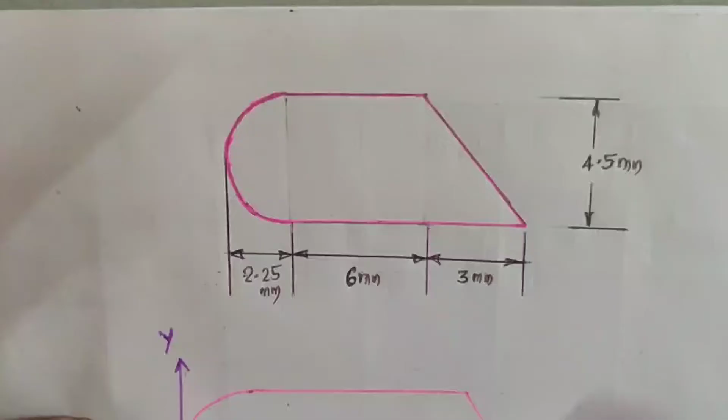Today I'll be taking up the next problem on Centroid. So in this session we'll be solving some more problems to have a better understanding of Centroid. Hope you liked the last session of the Centroid, where I discussed what are the steps to solve problems on Centroid. So in this part we'll be taking up one more problem on Centroid.

So what you see in front of you is an irregular shaped lamina whose dimensions are given. So what is the first step to start with any problem in Centroid? The first step is we have to fix up a reference axis such that the object falls in the first quadrant. Now the second figure what you see here is the same as the above one, but it is shown with the reference axis, such that it is falling in the first quadrant. So the reference axis is with respect to the left hand bottom side of the object.

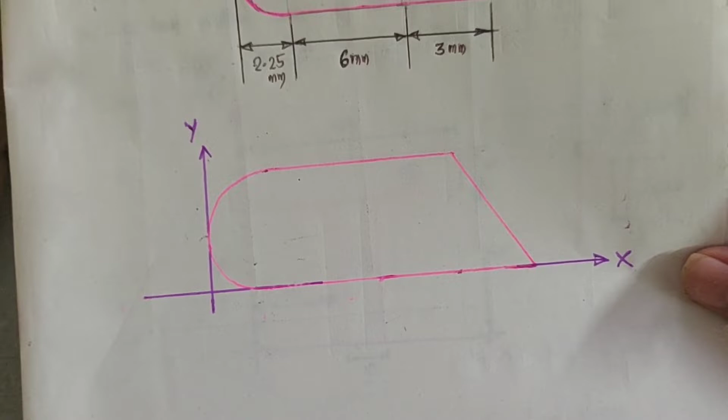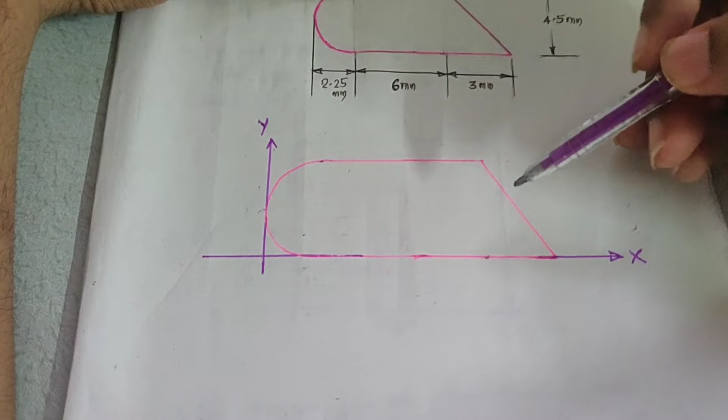Immediately after you fix up the reference axis, what is the next thing? We have to locate what are the possible known geometrical shapes that we can make out from this particular figure, so that we can divide them into smaller areas. Now when I see this figure as one, is it possible to locate the centroid? It is not possible, because I cannot arrive at any mathematical formulas. But I have derived some of the relations for some known geometrical shapes whose x bar, y bar have been already derived. So for this given figure, I'll divide it into the known geometrical shapes. Now how will I divide?

So what are the possible known geometrical shapes that you can make out from this? So one is, if I draw the straight line here and break this object, what is the shape that I am getting? I am getting a shape of right angle triangle. See here, I know this base, it is 3 mm from this tip. So if I divide this, I know what is its base, I know what is its height. It is 4.5. So I got one shape, it is right angle triangle.

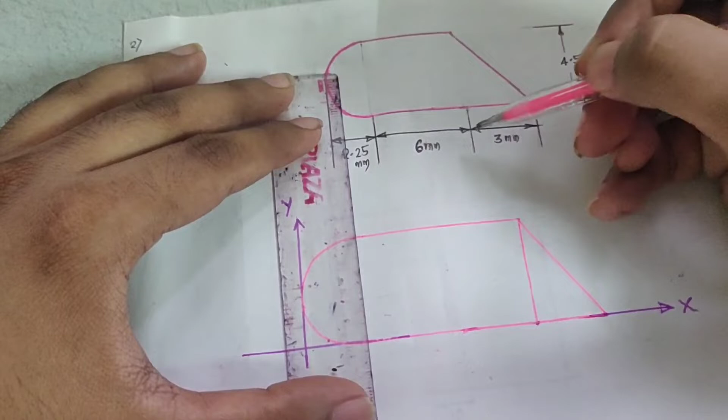If I draw one more line, from this to this it is 6 mm, so what is the shape that I am getting? I am getting the shape of a rectangle, right? So the rectangle base is 6 mm. The height is 4.5. Now what is the shape of this? This is the shape of semicircle. Now this 4.5 will be the height for this right angle triangle and rectangle. But the same 4.5 will be the diameter of this semicircle.

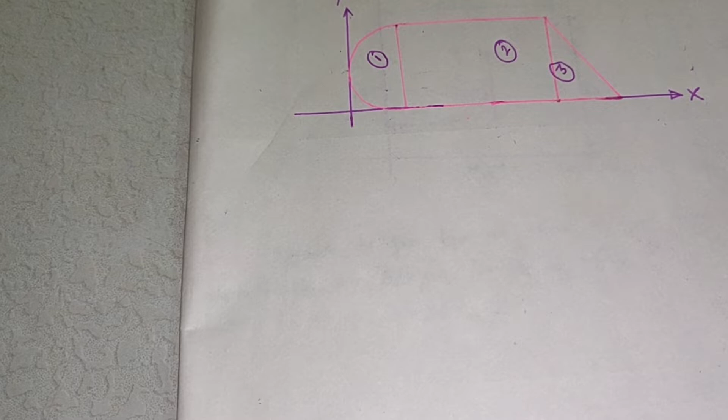Now I got 3 different geometrical shapes. So I'll mark them as 1, 2 and 3. This is the first step. This is the second step: I divided them into a number of shapes. Now to the next step. The next step is I need to subdivide those figures and locate their individual centroid. I should locate the individual centroidal distance of those elements.

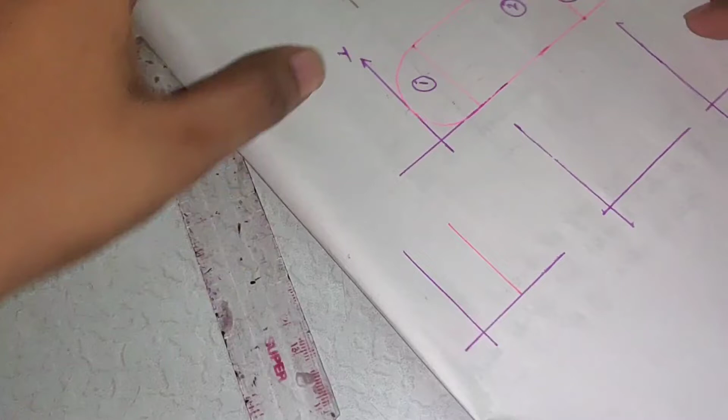Now what I'll do here is I'll subdivide them. So the purple line what you see indicates the reference axis. Now where is this first shape? This semicircle is here. So the semicircle is touching the reference axis. So its shape is like this, right? Then what about the rectangle? From this reference axis, from here it is the semicircle. So leaving some distance, the rectangle part starts.

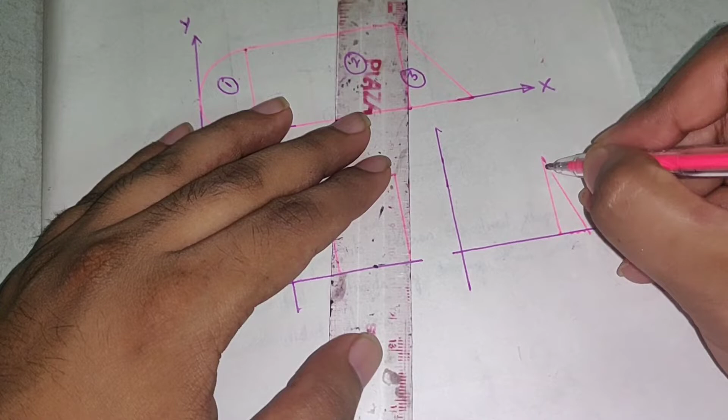Now to locate them with respect to their original position from the main figure. So this is the rectangular part, which is the second object. Now where is the third object? The third object is somewhere here. So it is at what distance? That is the distance of the rectangle and triangle. Right. Now what is the next step? Next step here is we have to locate their individual centroidal distance. Now the tricky part is with respect to the first figure.

Tricky part is with respect to what? It is with respect to the first figure. Why first figure? You'll understand now. Now we have derived the x bar, y bar value for semicircle. Now this semicircle, where should I cut such that area on left hand side and right hand side is same? Now if I cut it straight, will the area on left hand side and right hand side be same? No, it is not.

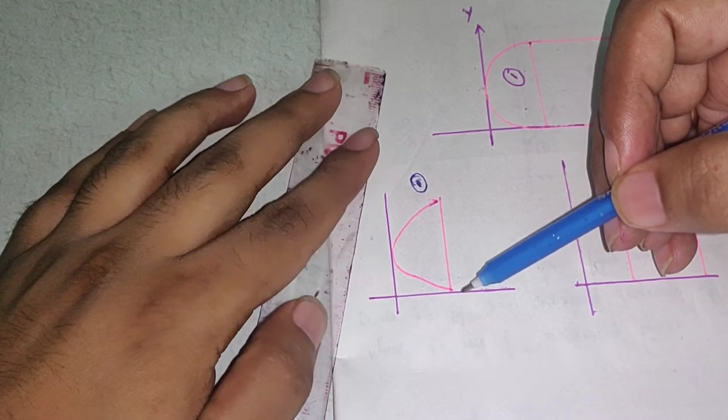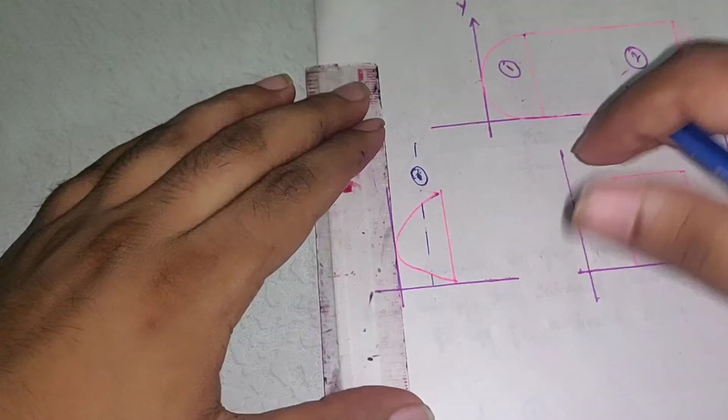But if I cut it horizontal, is the area on the top and bottom same? It is symmetrical about horizontal axis, but it is not symmetrical about vertical axis. So vertical axis is at what distance? Right, so let me show you a small part here.

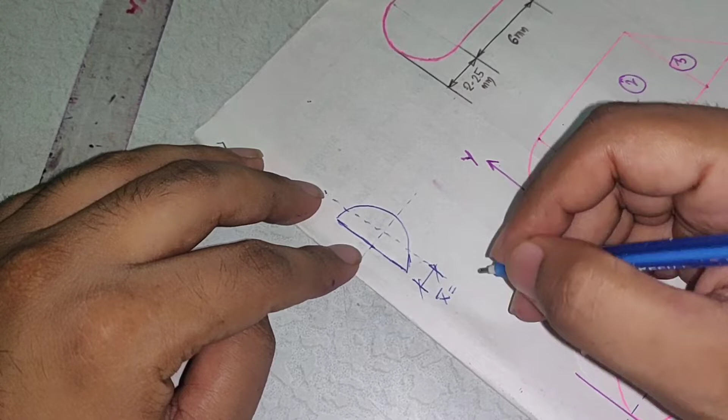So when we derived the relation for semicircle, I'll give some small explanatory notes here. The semicircle was placed like this, and we calculated its distance from here, and we termed this as X bar. If you don't remember, you can go back and check the derivation video. We marked this as X bar, and we had taken reference axis here like this. And after derivation we got to know that this value is 4r by 3 pi.

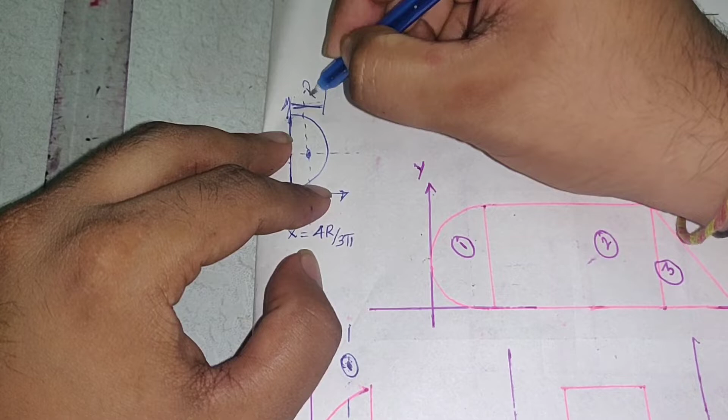But look at this semicircle now in this problem. The circular part is this side and straight line is here. So from this to this center is 4r by 3 pi. So what is this full length? This full length is radius, and this full length is diameter, right? So this is 4r by 3 pi, from this side to the center.

Now this semicircle, in this particular question, it is reversed like this, and this part is touching the reference axis. But 4r by 3 pi is from which side? This side. So in this figure, where is 4r by 3 pi? Take this figure and keep it ulta. 4r by 3 pi is here. I'll call this as G1.

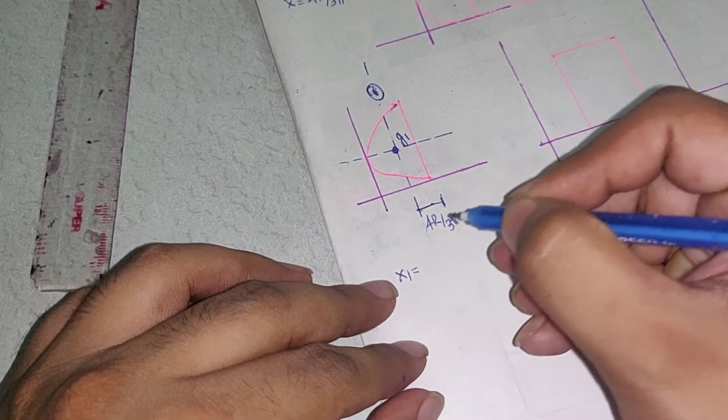But from where do I require the x1 distance? x1 distance is calculated from reference axis. I know that this distance is 4r by 3 pi. But x1 is from here to here. This is x1. So what is the value of x1 now? What is this complete distance? This is radius. How much is the value of r?

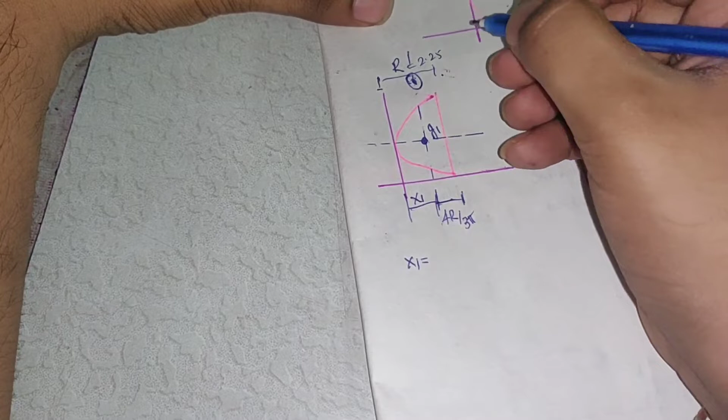2.25. So if this complete distance is 2.25, this is radius, then x1 distance will be R minus 4r by 3 pi. So that will be 2.25 minus 4 into 2.25 divided by 3 pi. So this will be your value of x1.

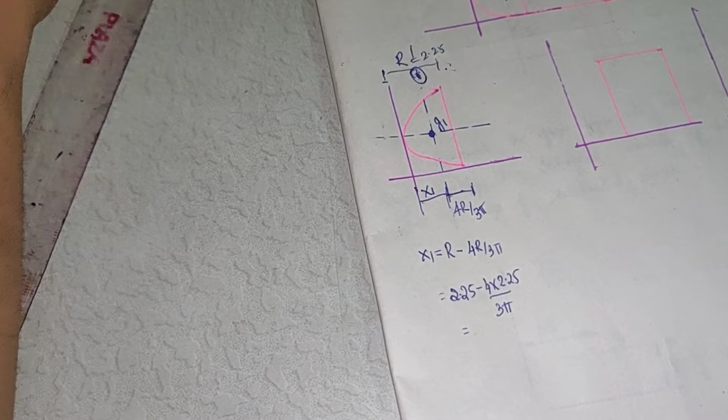So you calculate this, and you'll get the value of x1. Wait, we'll finish it off. So 4 into 2.25 divided by 3 pi, and it is 2.25 minus that. So you'll get this value as 1.29 mm. So we got x1.

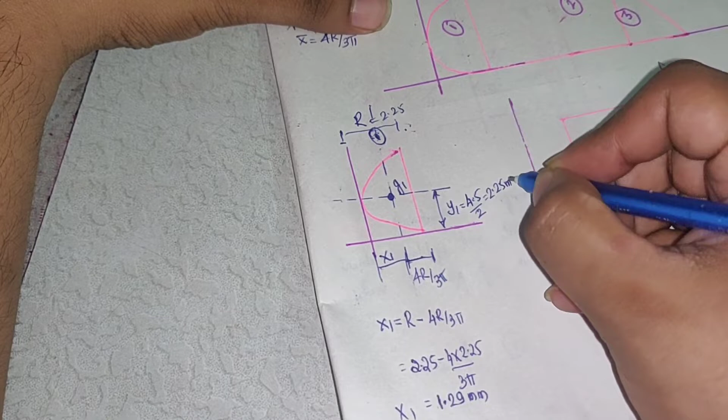Similarly, what will be y1? What is the total diameter of this semicircle? Total diameter of semicircle is 4.5. This is symmetric about the horizontal axis. So y1 will be 4.5 divided by 2, which is 2.25 mm. Okay, hope you understood this.

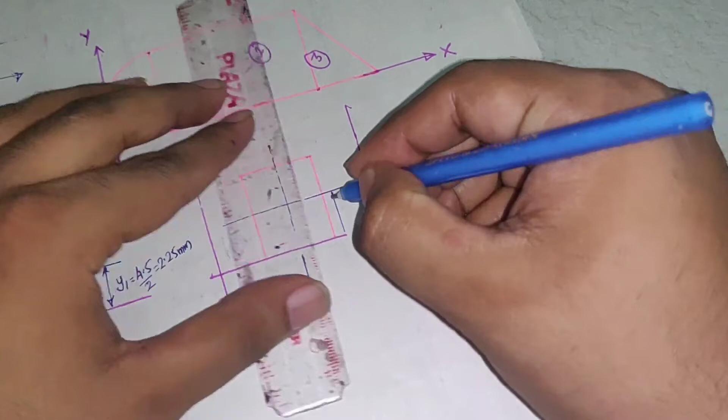Next, moving on to the center of the rectangle. What is x2 distance now? X2 distance, you have to calculate that. Wait. So I want x2 distance and y2 distance. We'll quickly finish off with y2 distance.

So what is the formula for calculating x bar and y bar for only rectangle? It is b by 2 and d by 2. So total height is 4.5. So y2 will be 4.5 divided by 2, which is 2.25 mm. What will be x2 distance? Now first calculate what is this distance.

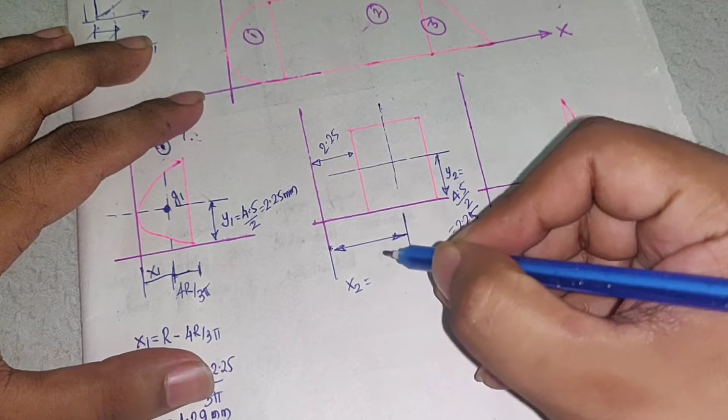This distance is same as the radius of semicircle. So this distance is what? 2.25 mm. But I want x2 distance from what point to what point? So this is point G2, which is centroid of only rectangle. So I want from this centroidal distance to this reference axis. What is the value of x2? X2 value is, this is 2.25

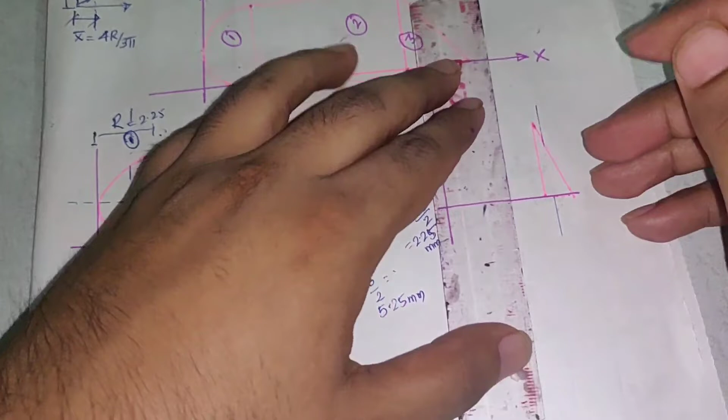plus, what is b of this? So what is this b? B is 6 mm. So x bar of rectangle is what? 6 by 2. So 2.25 plus 6 by 2. So we'll get 3 plus this 2.25. This is 5.25 mm. 5.25 mm. Similarly, for this rectangle, this right angle triangle,

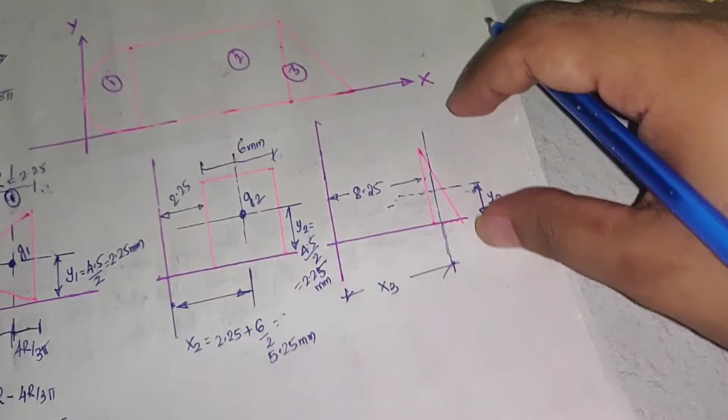so this distance is y3 and this distance is x3. Now what is the distance from the edge of the right angle triangle to the reference axis? From this point to this point, it is what? 6 plus 2.25. This is 8.25. But I want from the center of this point, G3, to the reference axis. How much is that? So how will you calculate that?

So for right angle triangle, I had told already that the CG will be, from this straight line, 1/3 of base, and from this side it is 2/3 of base. If you are taking from here, it is 2/3, from here it is 1/3. Similarly for height also, it becomes D by 3 and 2D by 3.

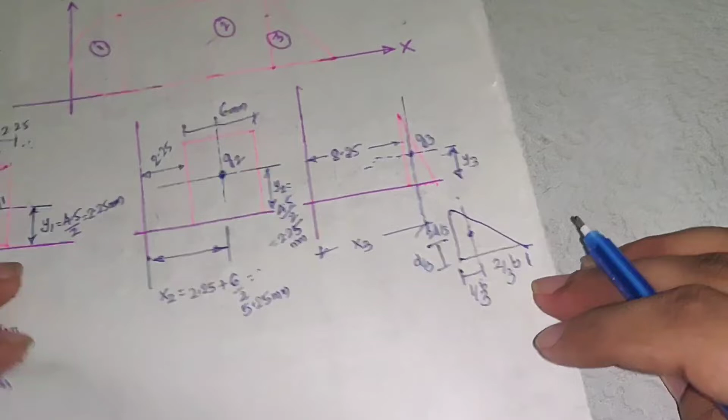Now what is value of x3 here? So x3 will be 8.25 plus, what is base of this? Base of this is 3. So we are taking from this side. So that will be 1/3 of 3. So we'll get 9.25 mm. 8.25 plus 3 cancels 1. So x3 is 9.25. And what is y3?

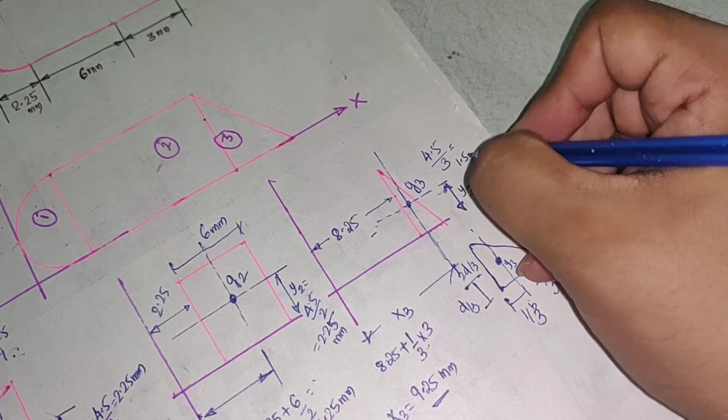So y3, as I said, from this base to the CG, which is G3, is D by 3. So how much is the height? 4.5. So y3 will be 4.5 divided by 3, which is 1.5 mm. So we got x1 y1, x2 y2 and x3 y3. Once you calculate this part, your 90% of the work is over. Next thing is you have to just put it in the tabular column and finish off.

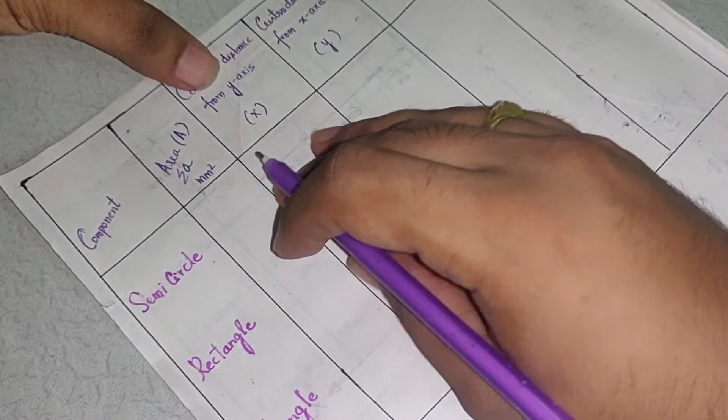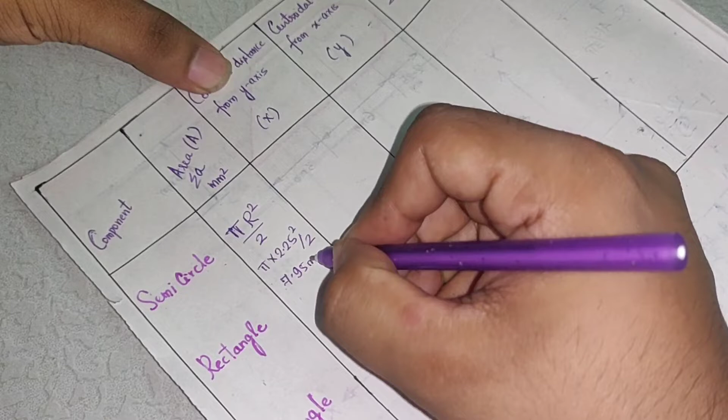Okay, so after you split up the things, the next step is you have to write down those segments that you have divided into the known geometrical shapes: semicircle, rectangle, triangle. Now you have to enter them in the tabular column. Area of the semicircle is given by pi r square by 2. So pi into 2.25 square divided by 2, you'll get the area as 7.95 mm square. So writing a unit is very important, right?

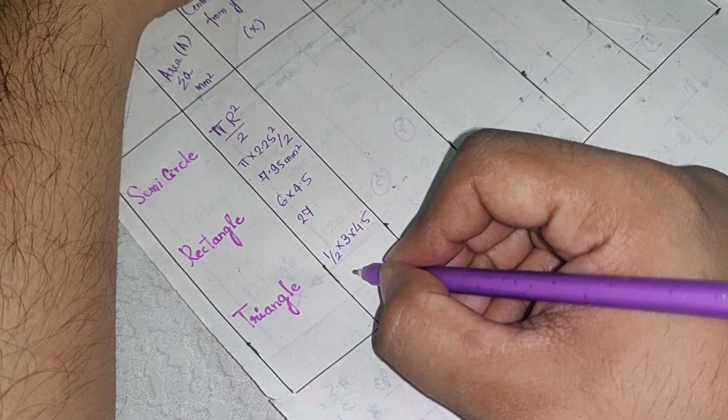So area of rectangle is 6 into 4.5. 6 is the width and height is 4.5. So that will be 27. And triangle is half, base is 3 and height is 4.5. So this will be 6.75 mm square. Once you calculate the area, enter the values of x distance that you have done in the second step. Now what are the x1, y1 distances?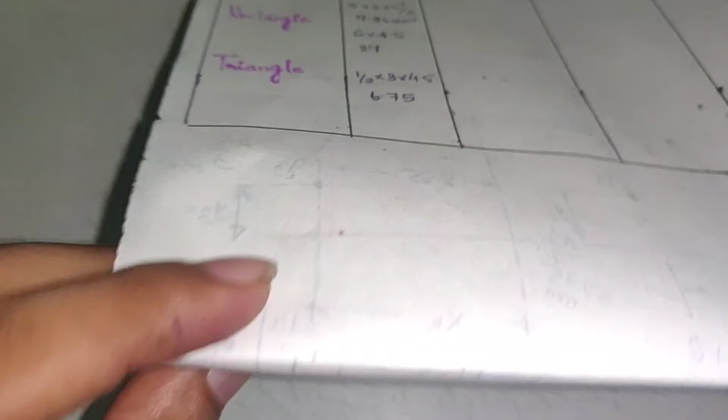I'll show you here. So x1 distance is 1.29 and 2.25 for semicircle. Firstly I'll only consider the x distances. X distance for semicircle with respect to reference axis is 1.29. Then x2 for rectangular element is 5.25. Then x3 is 9.25. X distance is with respect to the y axis, right? That is why I have written centroidal distance from y axis. So write the values: semicircle is 1.29, rectangle is 5.25 and triangle is 9.25.

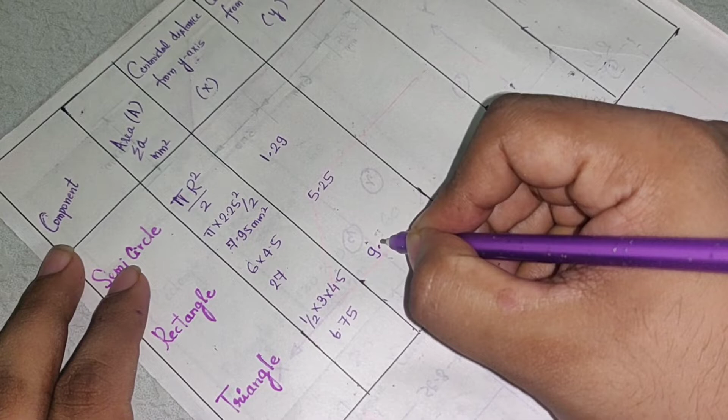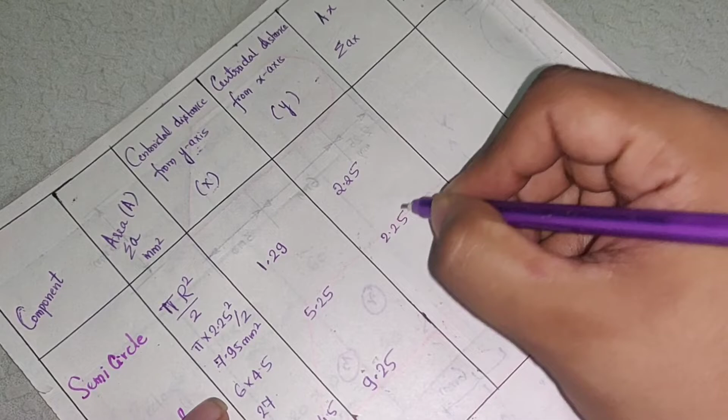So this is x distance. Similarly, go ahead and find out the y distance. Y distance for semicircle is 2.25, for rectangle it is also 2.25, for triangle it is 1.5. So write those values here. This calculation of x distance and y distance is very important. Once you calculate x distance and y distance, rest all things is mathematics.

So area a into x, a into y. So summation a into x is a1 into x1, a2 into x2. So first one is 7.95 into 1.29. Similarly, this is 7.95 into 2.25.

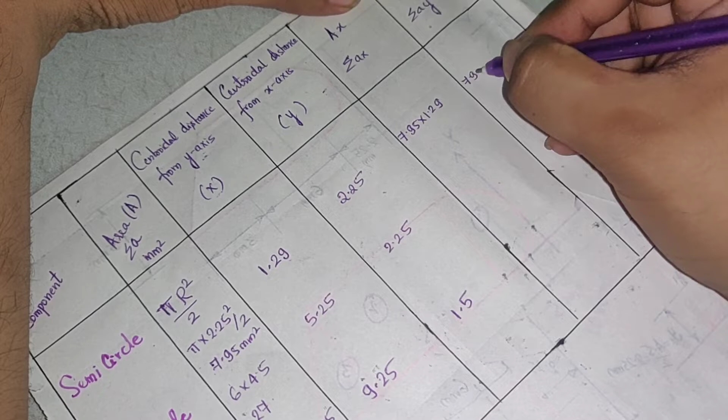We'll calculate that. How much is the value? So 7.95 into 1.29, so we'll get this as 10.25. And this one, 7.95 into 2.25 is 17.88. Similarly, this one, 27 into 5.25. And this is 27, the area, into 2.25. So 27 into 5.25 is

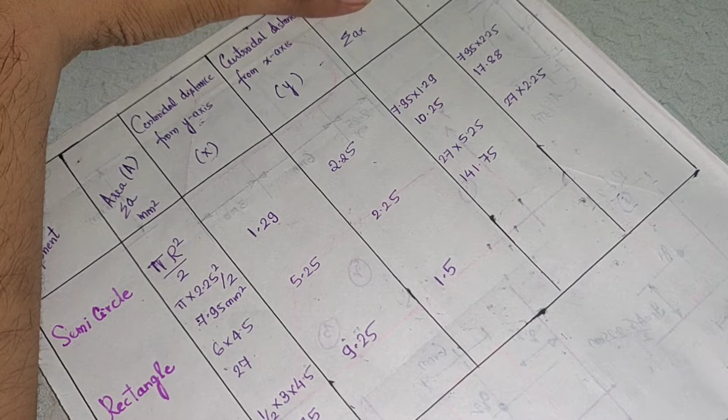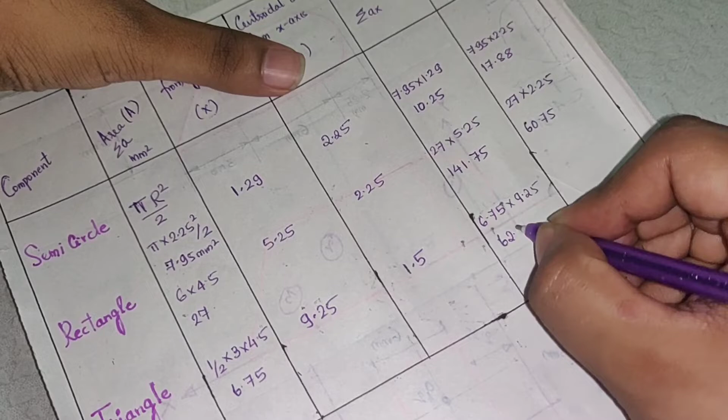141.75. And this, 27 into 2.25 is 60.75. Similarly, area is 6.75 into 9.25. This is 6.75 into 9.25 is 62.43. Similarly, 6.75 into 1.5 is 10.125. Now what is the thing here?

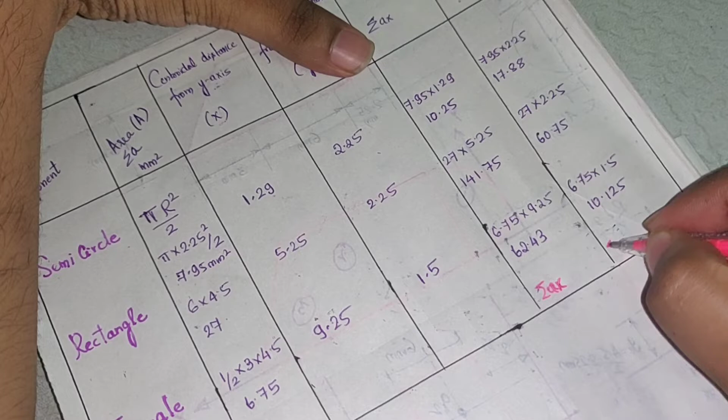You have to add what is the value of summation A into X and summation A into Y. Also add what is summation area. So summation area will be, add 7.95 plus 27 plus 6.75. So area here is 41.7 mm square. Similarly, add this A into X. So this is 10.25 plus 141.75 plus 62.43. You will get A into X is 214.43.

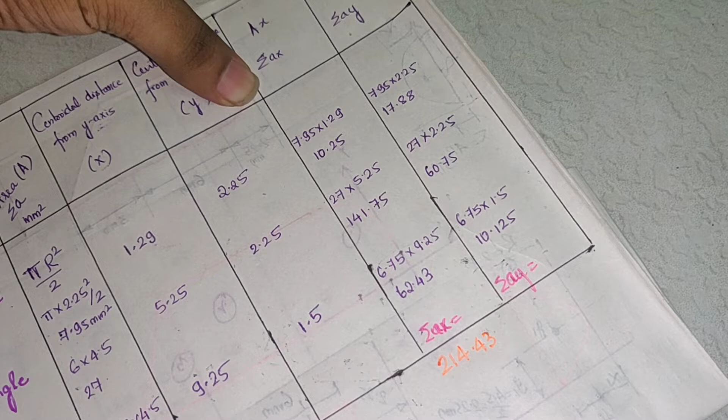Similarly, 17.88 plus 60.75 plus 10.125. You are getting this as 88.75. So once you get these values, what is the next step? Next step is X bar is equal to summation A into X divided by summation A. Similarly, what is the formula for Y bar? It is summation A into Y divided by summation A.

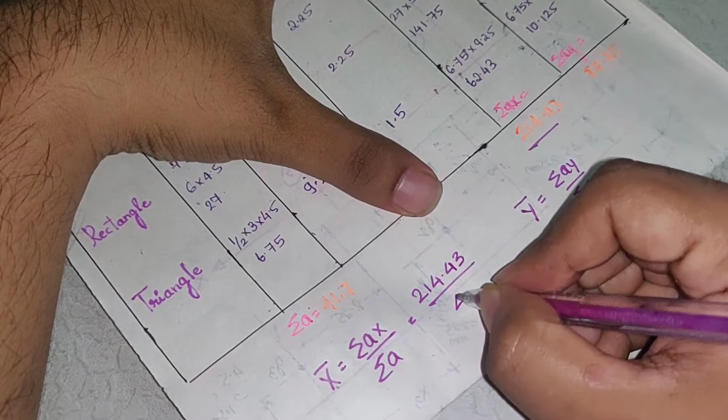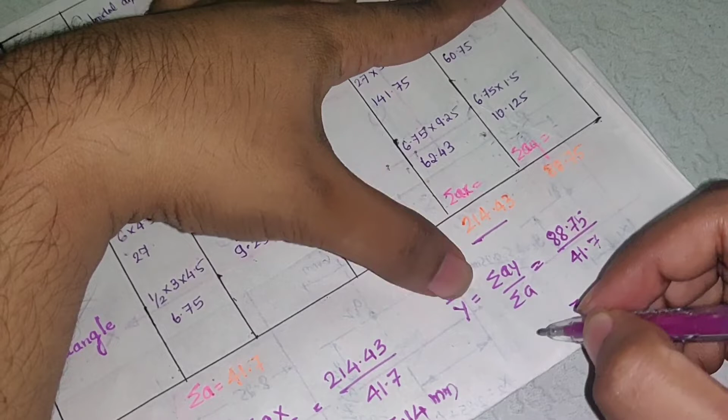Now what is summation A into X? It is 214.43, divided by summation A, which is 41.7. How much will you get? 214.43 divided by 41.7, you will get this as 5.14, and the unit is mm. Similarly, Y bar is 88.75 divided by 41.7. So you will get the value of Y bar as 2.13 mm. So X bar is 5.14 and Y bar is 2.13.

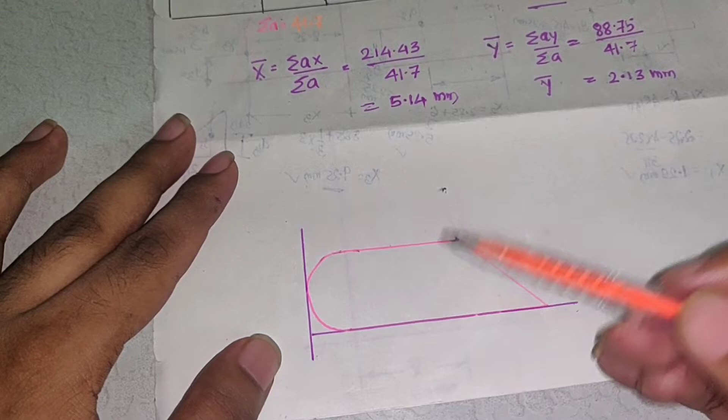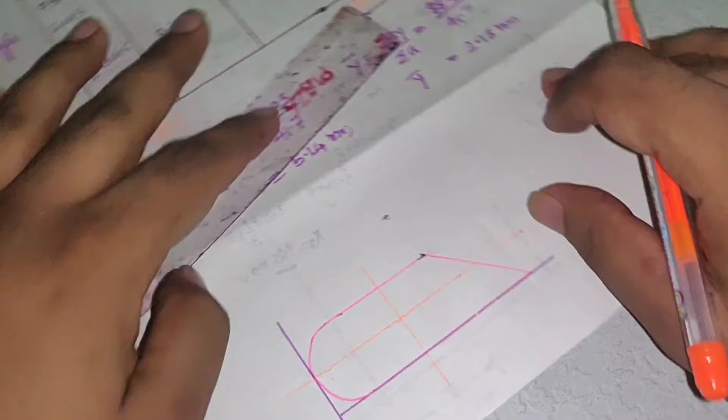Then the last step, once you get the value of X bar and Y bar, is to represent it. So from the semicircle it is 2.25, and this is 6. Means it will come somewhere here. And the value of Y bar is 2.13, means what? Total is 4.5, so somewhere here. So from this you have to represent the value of X bar and Y bar.

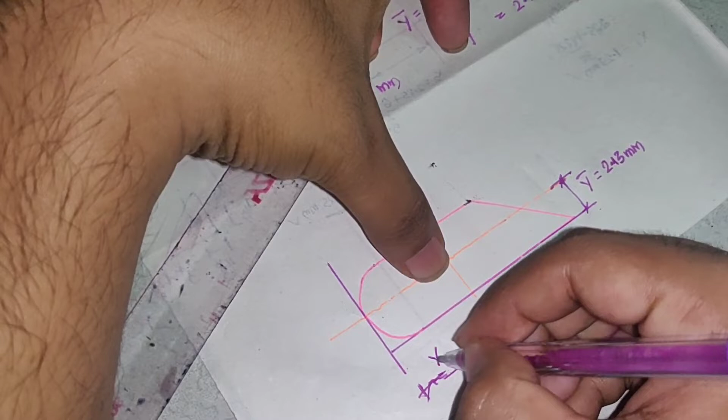Now from here it is represented as Y bar, which is 2.13 mm, and X bar, which is 5.14 mm. This completes one problem. So this is capital G. Hope you follow this problem.

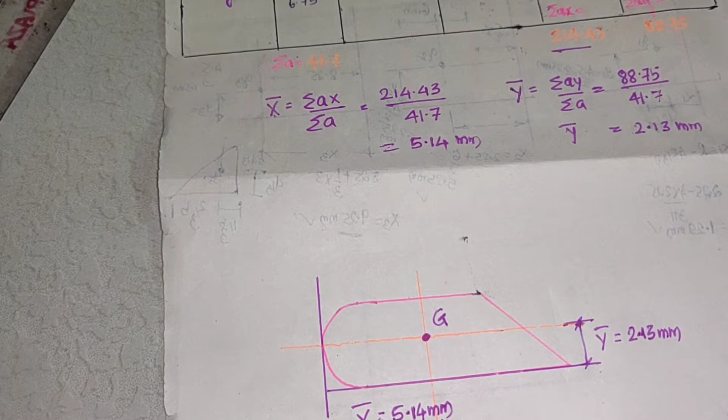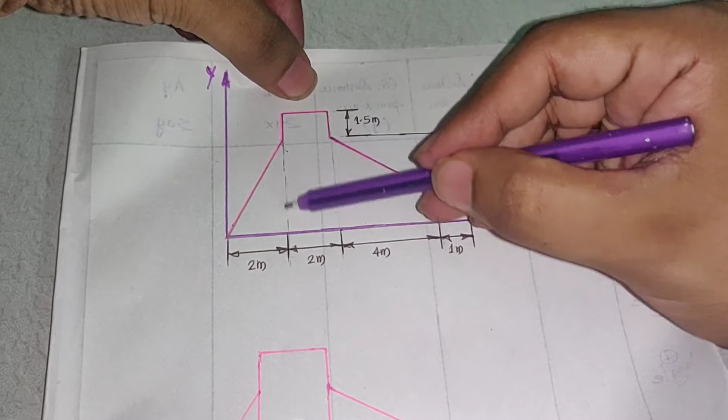See here, I have drawn a line because I know this base and I will know the height, 1.5 plus 1. So I can make out this. Similarly, for this rectangle I know the base is 2, and the height is 1.5 and 1. This part, I have drawn a horizontal line which divides it into a right angle triangle and a rectangle. This height is 1.5, and the base is 4 meter given. Then this rectangle, the base will be 4 plus 1, 5, and the height is 1 meter, which you can see here.

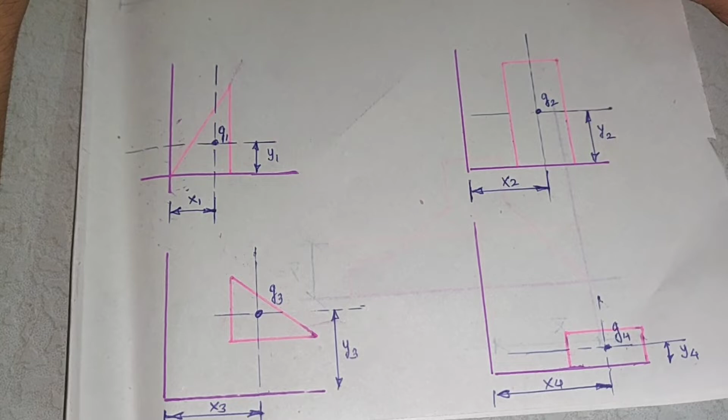Right. So this is how I have divided the figure or a lamina into 4 known geometrical shapes. After that, what is the next step? So next step is we'll subdivide the areas locating their own centroidal distances, that is small g1, g2, g3 and g4. Right, they have their own individual x1 distance, y1 distance, x2 distance and y2 distance. Similarly x3, y3, x4, y4.

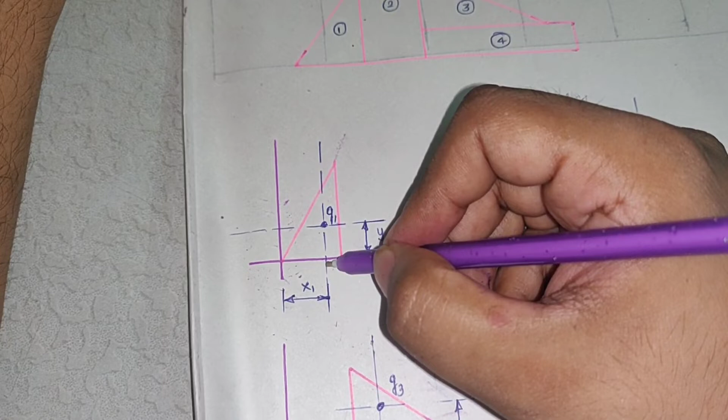Now we'll start with calculating the x1 and y1 distance. So first, before we calculate x1 and y1 distance, what is the dimension here? So base of this right angle triangle is 2 meters and height is 2.5 meters. So as I said in the last problem, from this straight line to the center it was how much? 1/3. From this side it is how much? 2/3. Now reference axis is with respect to this tip. So what will be x1 distance? x1 distance will be 2/3 of, what is the base? Base is 2 meters. So this will be 1.33 meter. So x1 distance is 1.33 meter.

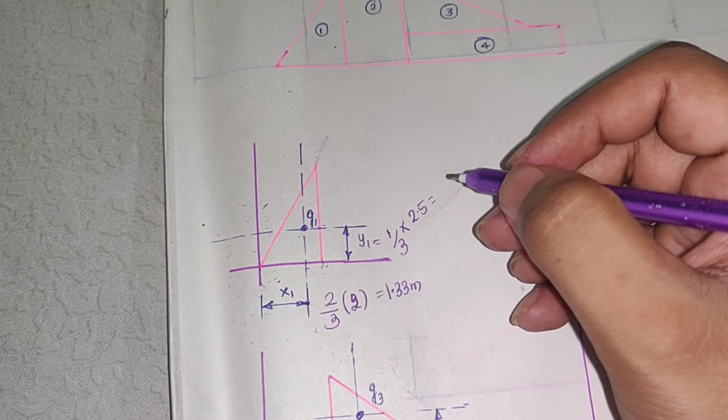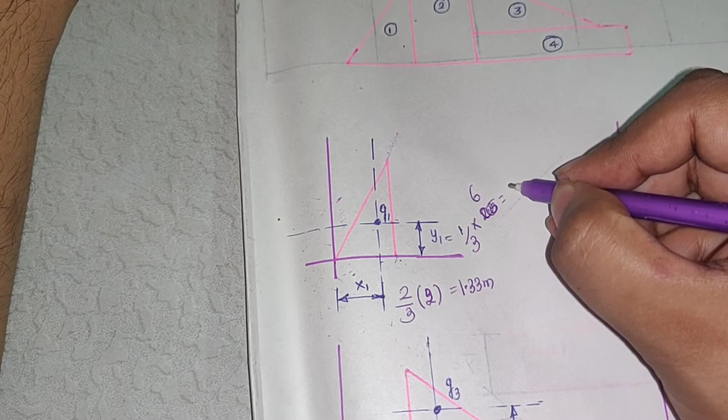Similarly, what will be y1 distance? y1 distance from base is d by 3 and from top it is 2d by 3. So from base it is d by 3 and what is the height? It is 2.5. So this will be 1/3 of 2.5. Sorry, this is not 1.5, please make a correction. This is 5 meters. So 1/3 of 6 meters. Why 6? Because from here to here it is 5 meters and this is 1 meter. So 1/3 of 6 is 2 meters. So y1 distance is 2 meters.

Similarly, now we'll go to the second element. Second element is this rectangle. What is the base? 2 meters, and height is 1 meter plus 5 meter plus 1.5. 1 plus 5, 6, plus 1.5 is 7.5. So what is x2 distance now? From here to here it is 2 meters. How 2 meters? Because this area is occupied by the right angle triangle. But I want from this reference axis to the center.

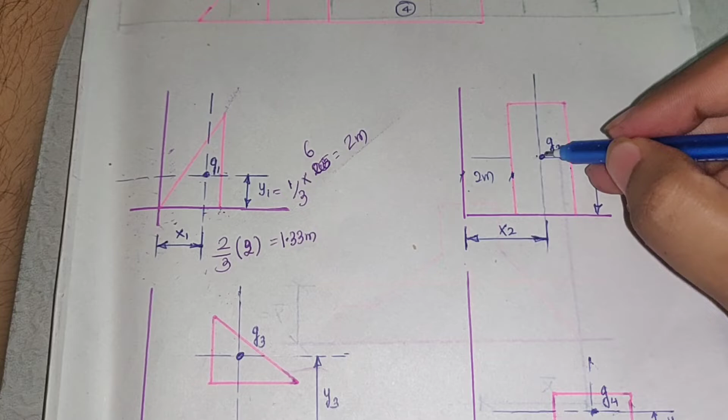So 2 plus, what is the formula to calculate centroid of this rectangle? It is b by 2. So b by 2 is how much? So x2 distance will be 2 plus 2 by 2. You will get 3 meters. Then total height is how much? 7.5. So this will be 7.5 divided by 2. This will be 3.75 meters. 3.75 meters.

Similarly, now going to this one. This I have calculated, this I have calculated. Remove this. Now I am only concentrating on the third. This particular right angle triangle is nowhere in contact with the reference axis x or y. It is at some distance. So if you look from this reference axis, this right angle triangle is at a distance of 1 meter. From this side it is at a distance of 4 meters.

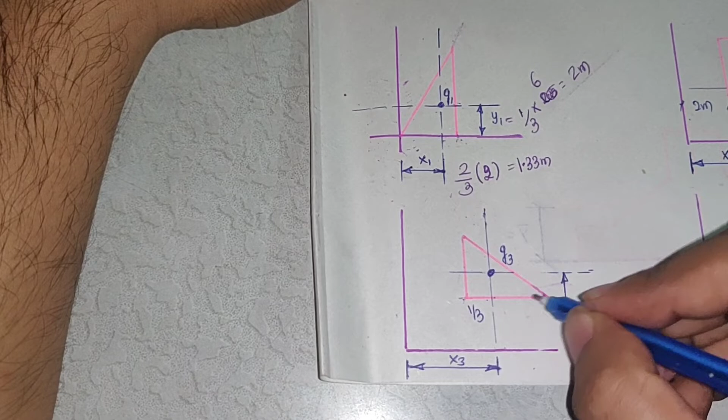Now we are calculating the centroid of this right angle triangle from this reference axis. So from straight line, the centroidal distance is 1/3. From this tip it is 2/3. Now this right angle triangle orientation here is reversed, ulta. Earlier we had taken this as 2/3, but the same right angle triangle is reverse like this, and reference axis is here. So with respect to reference axis, this is 1/3.

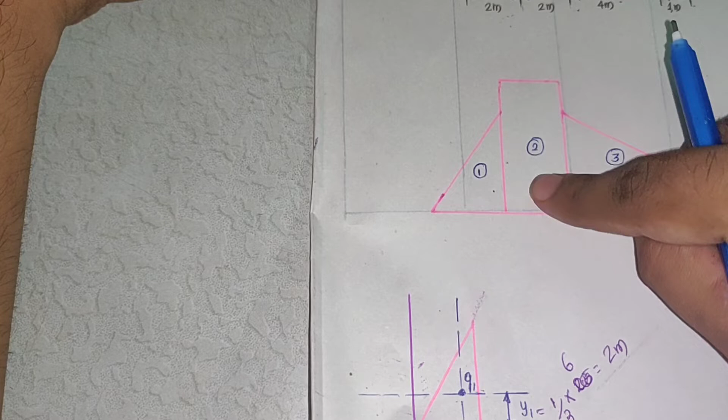So what will be value of x3 now? From here to here the distance is 4 meters. Why 4 meters? This space is occupied by this right angle triangle and this rectangle. So this is 2 meters, this is 2 meters, so this is 4 meters. So value of x3 will be 4 plus 1/3 of the base. Base of this is 4 meters. 1/3 of 4. So this will be 4 plus 1.33 is 5.33 meters.

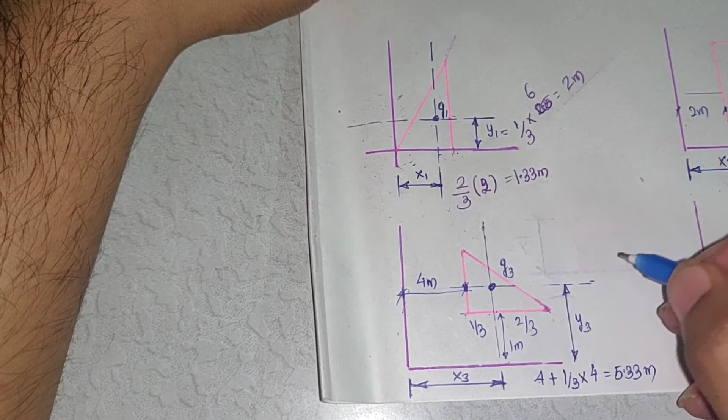What will be y3? From here to here I know that this is 1 meter, as I told you. So from base, the centroidal distance is 1/3 of d. So what is the total height of this? This is 5 meters. So y3 will be equal to 1 plus 5 by 3, that is 1/3 of 5. So 1 plus 5 by 3, you get 2.66 meters.

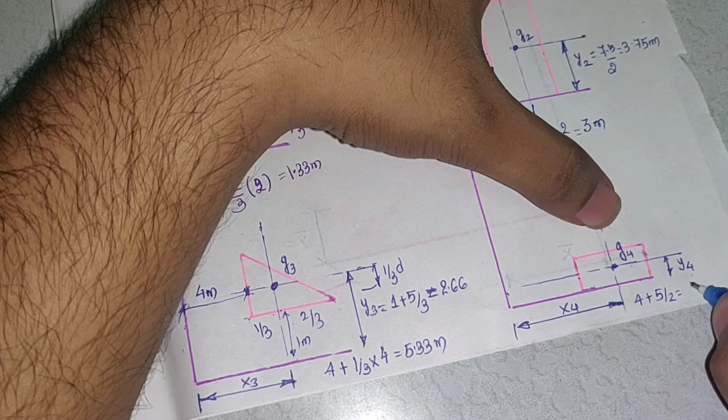Now going on to this, what is x4 distance now? From here to here, how much is the distance? So from here to here it is 4 meters. So 4 plus, what is the width of this? This is 5 meters. So this will be 4 plus 5 by 2. So this will be 6.5 meters. Similarly, what is y4?

Y4 is 1 meter, the depth. You can see here, this is 1 meter depth. So d by 2 is 1 by 2 is 0.5 meters. So we got the values of x1, y1, x2, y2, x3, y3, x4, y4. Now what is the next step? Just write them in the tabular column.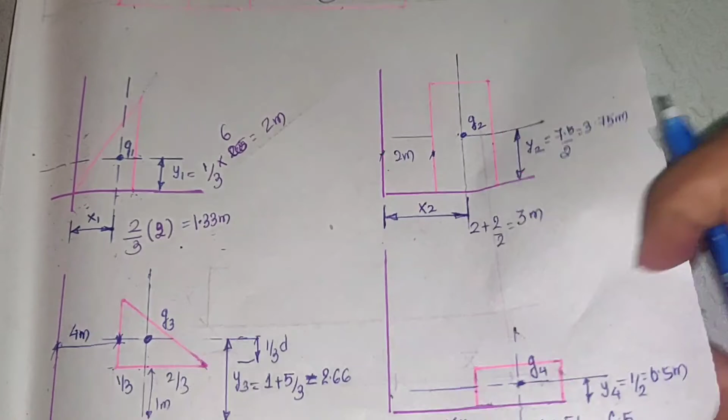So this is 1.33. Second rectangle is 3 meters. This triangle is 5.33 and this is 6.5. Similarly, I'll write y1, y2, y3 distance. So y1 distance is 2 meters, y2 is 3.75, y3 is 2.66, y4 is 0.5.

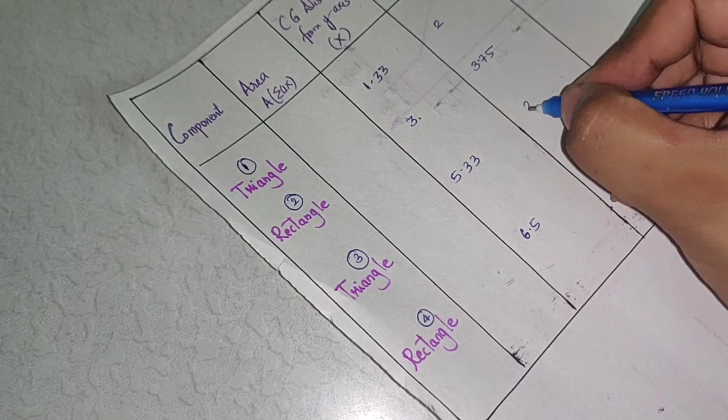So y1 distance is 2 meters, y2 distance is 3.75, this is 2.66 and this is 0.5. Now what is the area of triangle? Area of triangle is half, base is 2 meters and height is, not 6.5, sorry, height is 6 meters. So half cancels, so this will be 6.

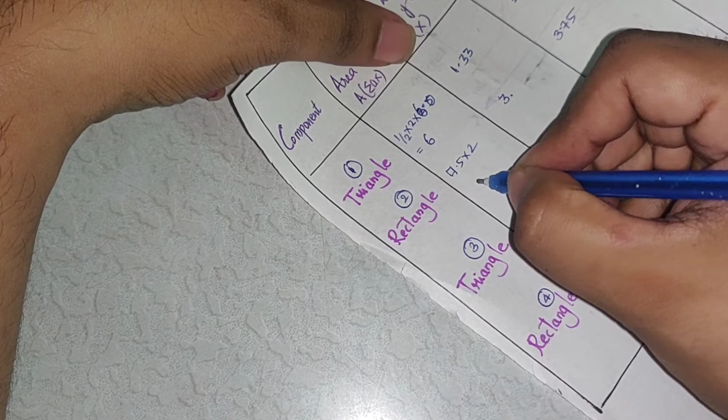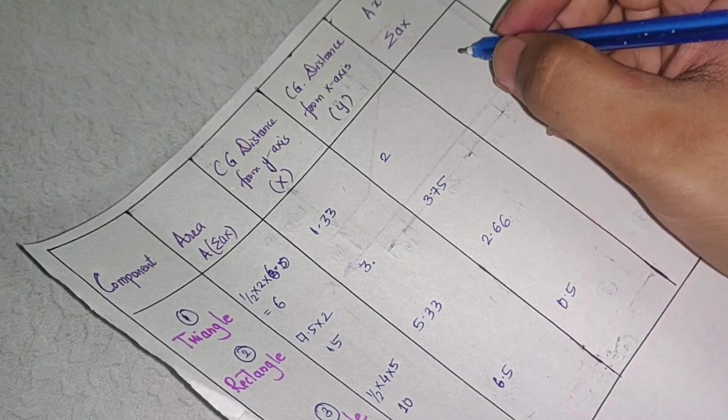So rectangle is 7.5 into 2 is 15. Triangle is half, base is 4 and height is 5. So this will be 10, and this is 5 into 1 is 5. Now what is the next thing? You have to just multiply A into x, A into y. So 6 into 1.33.

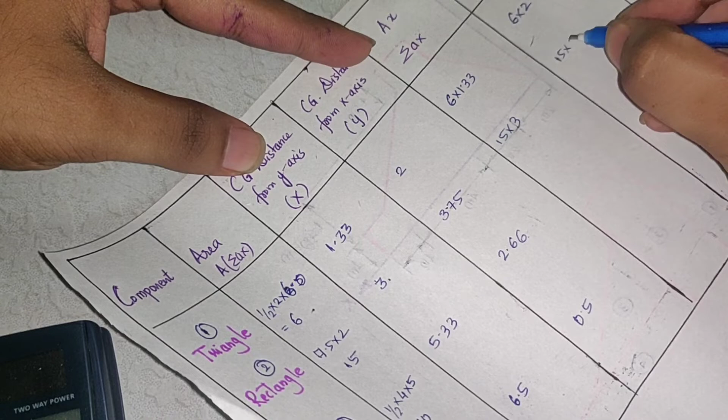So this is 6 into 1.33, similarly 6 into 2, and this is 15 into 3, this is 15 into 3.75, and this is 10 into 5.33, this is 10 into 2.66, this is 5 into 6.5 and this is 5 into 0.5.

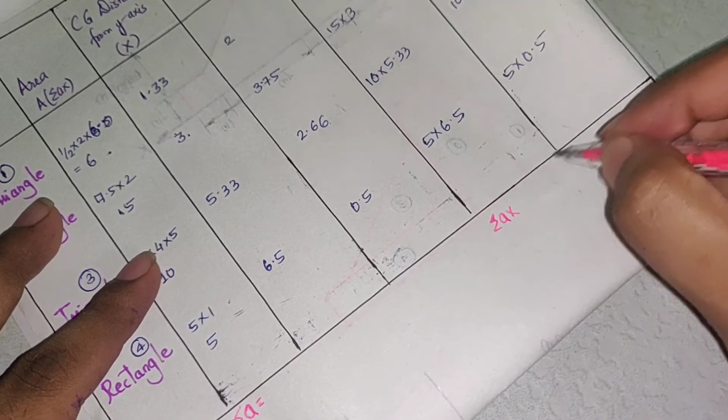Now once we calculated this table, the next step is you have to calculate summation A into x and summation A into y. Summation A is 6 plus 15 plus 10 plus 5 is 36. So total area is 36.

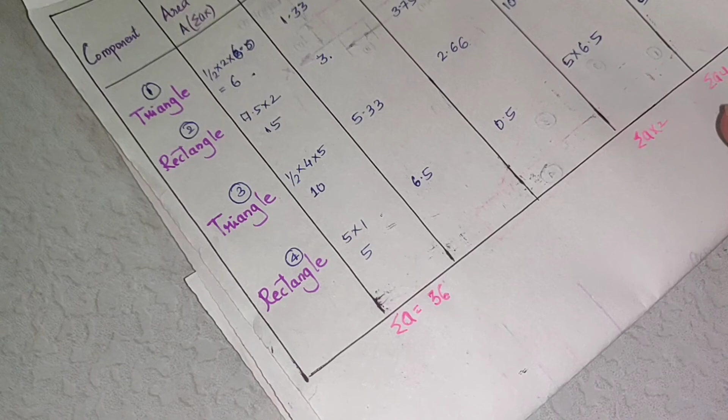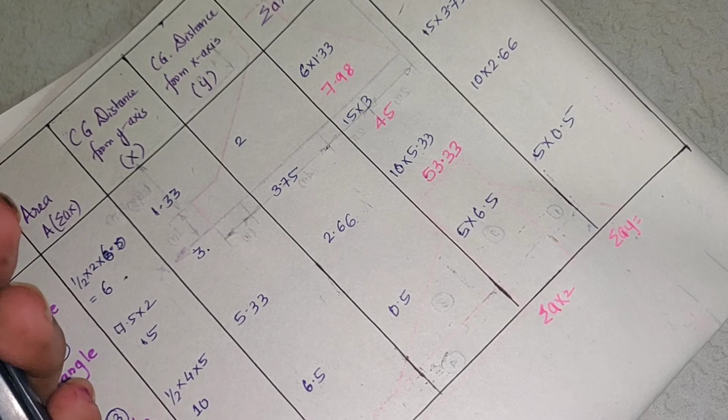Then A into x is 6 into 1.33, this is 7.98. Then 15 into 3 is 45. 10 into 5.33 is 53.33. 6.5 into 5 is 32.5. So add all that and we'll get the required A into x. So A into x is 138.81. Do it similarly for this part.

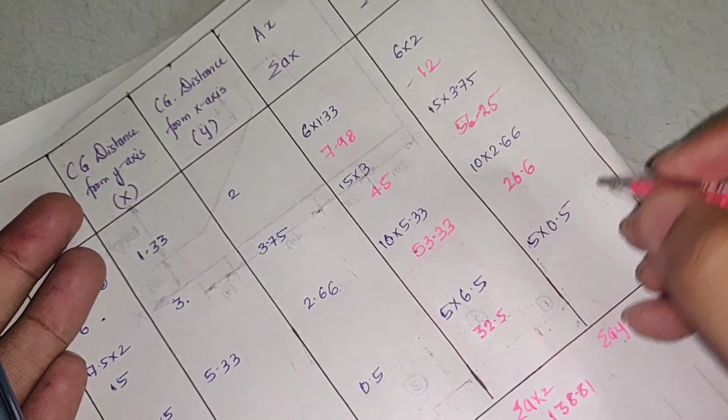6 into 2 is 12. 15 into 3.75 is 56.25. 10 into 2.66 is 26.6. 5 into 0.5 is 2.5. So adding all this, 12 plus 56.25 plus 26.6 plus 2.5, you will get 97.35. Now what will be the value of x bar and y bar?

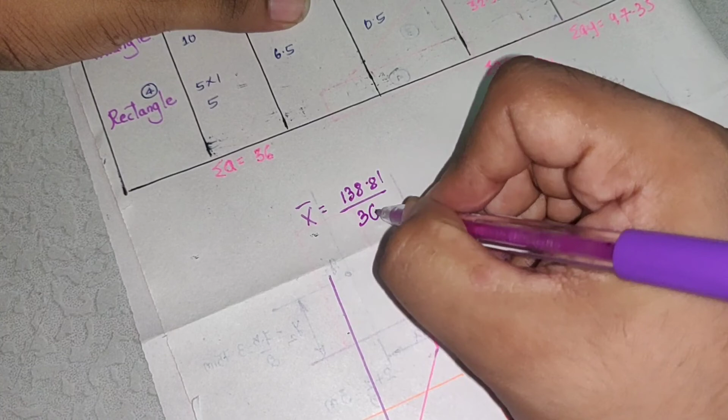x bar is A into x, which is 138.81, divided by 36. This will be 3.85. Similarly you calculate y bar. This is A into y, that is 97.35 divided by 36. You will get 2.7.

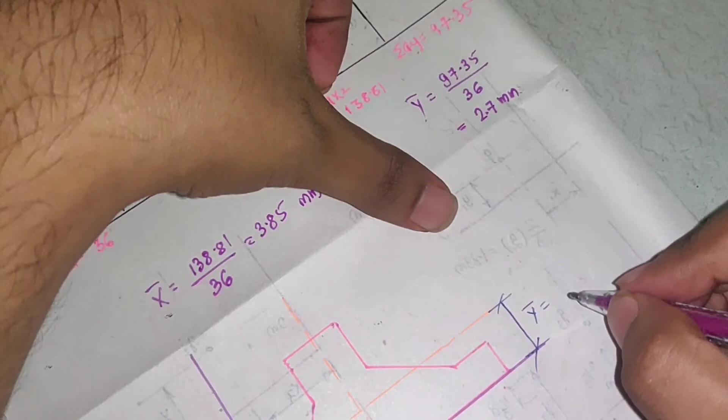So this completes your problem. Just mark the values of x bar and y bar. This is 3.85 and this is 2.7. So these are the problems on centroid for solid laminas. I hope you are following these problems. Any doubts, please feel free to ask. And the assignment for you people is this particular problem. You can have a look.